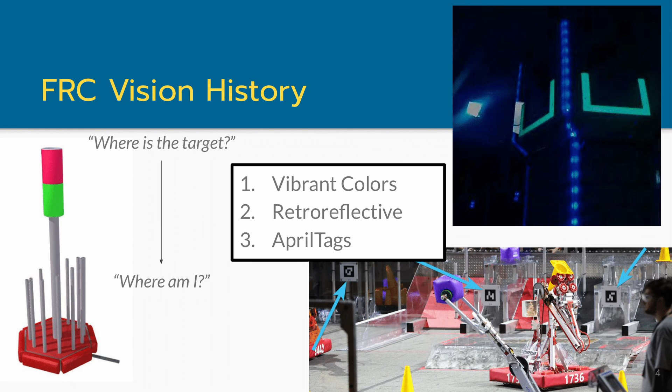AprilTags are industry-wide standardized, what are called vision fiducials. You might see these in some warehouses where they have automated robots moving around, and it's a better target for the reason that you'll see it in the real world. Retroreflective tape and vibrant colors are suspect to lots of noise and other issues.

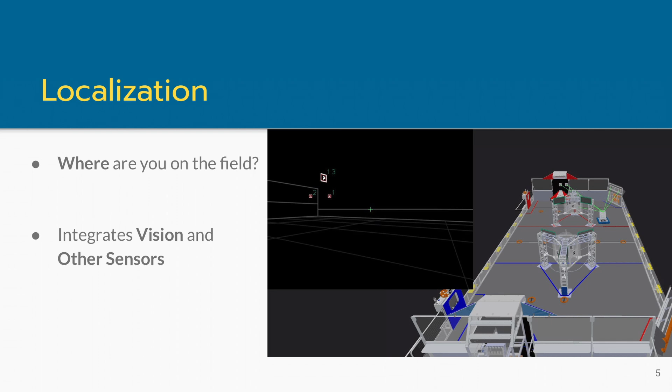Localization is ultimately one of the large goals of looking at the world with your cameras. It's the math behind answering where am I actually on the field, or in a warehouse, or in the world. It works by combining information from computer vision and other sensors potentially to estimate your robot's location in this space.

So why do we care about making this better? Why do we need to add more information? Hopefully we'll answer some of the how and what in this presentation, but you'll still be responsible for determining the when. Generally, you should employ vision when it's better than other choices, and in FRC this implies more points per second. To be better than the alternatives, you need a vision system or component of an automation system that's faster than mechanical alignment or human play, or that reduces stress on the humans at the robot so they can focus on other tasks. Achieving this can take multiple seasons, but you can't beat a human driver if it's not worth it. If your vision system is used to enhance autonomous, it needs to improve the average points scored per second rather than simply adding variability. Alternatively, vision should be employed when you have students interested in learning about it, regardless of the competitive benefits. I get a ton out of working on PhotonVision personally, and it has helped me develop in my career as well.

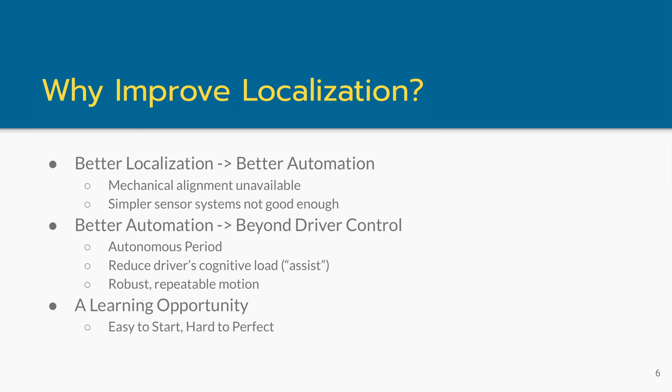So to drive home the point of exactly what localization is: the whole idea is that we're trying to give your software some computed notion of where your robot's at on the field. Here's a quick video of it working on a robot right now, where as the robot drives around, on the dashboard critically, you can see the little white robot moving around on the field. Again, that's the software's notion of where it thinks the robot is at on the field, calculating that in real time as the robot moves around.

Alright, so I want to get into a little bit of what we're going to describe as the vision pipeline. This really is, by and large, how almost all teams are breaking down this problem of using a vision system in 2024.

We've got the real world. There are things out there that you care about. Light hits them, reflects photons into your camera. The camera measures those photons and sends back pixel data to some set of processing hardware and software. That hardware and software is responsible for analyzing the pixels and trying to figure out, relative to where the camera is at, what it sees in the world and where it's at relative to the camera.

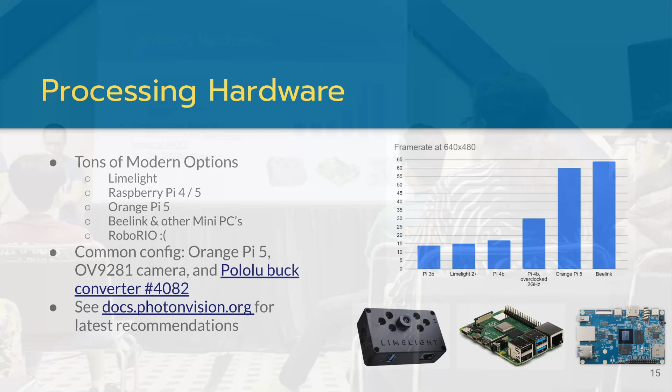So to go along with the camera, you obviously need hardware to actually process the frames that you get. A big question we get from teams is how do I pick hardware and what should I use on my robot? At the end of the day, it's trying to optimize between increasing FPS, decreasing latency, decreasing cost, and minimizing the challenge you face when using the software or hardware.

There's a lot of modern options out there for teams. We have the Limelight, probably the biggest, which is a Raspberry Pi, power supply, camera, LEDs, all in one nice package. It's great if you want a tried and true, easy to use package. After that, there's the Raspberry Pi, a very popular single board computer that lets you use single CSI cameras and has pretty solid software support.

The most popular option for teams using PhotonVision is the Orange Pi 5, which has better performance than the Raspberry Pi in a similar form factor. It's also relatively affordable. After that, if you're looking for even better performance, you get into the realm of mini PCs like the Beelink, where you get better performance but also face a harder integration challenge.

Now, obviously we're not limited to this. There are a ton of other co-processors you could use, but these are the ones that have been tested by a bunch of teams and are the most popular options, we'd say. Obviously we do have the RoboRio, but we don't recommend anyone does this kind of computation on the RoboRio. It wasn't meant for it, but it is still possible for teams.

The most common configuration we see for teams using PhotonVision is the Orange Pi 5 mentioned previously, the USB OV9281 camera, which is a global shutter camera, and the Pololu buck converter, which is found on the link there.

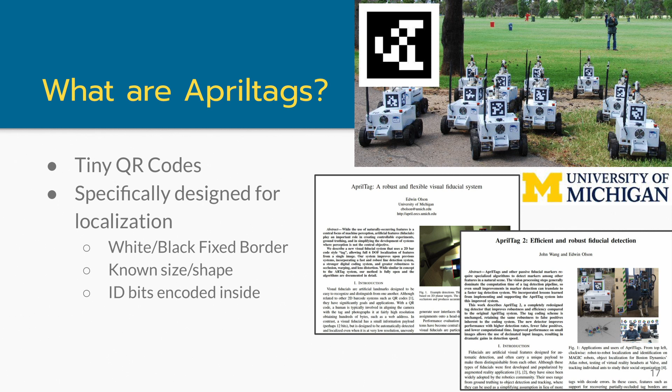These are placed on the field in known locations, and those are just in the game manual. In this case, there are up to 600 different tag IDs that you can encode using that 6x6 grid of pixels. The corner location, the transition between this white border and the black inner border in those 4 corners, is really critical for localization, because that's the information we feed into our code to tell us, well, we see these corners at this location, where must our robot have been?

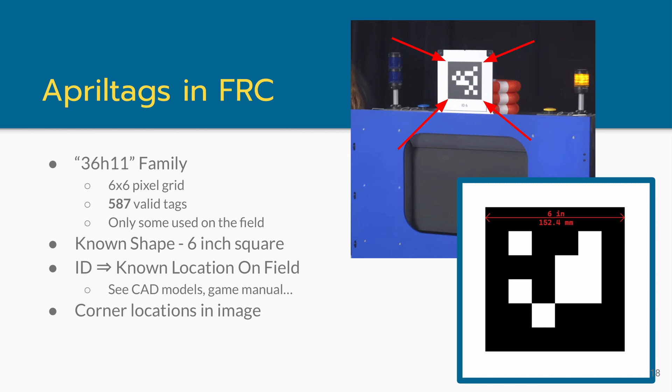Alright, so you guys all came here to talk about Apriltags, and the one thing we were going to not recommend you do is go write software to find Apriltags in pictures. There are libraries out there to do that. PhotonVision uses a library, WPILib provides you one. You shouldn't have to write the literal code going through pixels to figure out, is this pixel part of an Apriltag or not? That being said, it is useful to know what those libraries are doing under the hood, so I want to quickly go through the general algorithm used to find Apriltags in a picture.

Obviously, first step, take a picture. We go frame by frame through the image, one picture at a time. The very first thing we do is look for sharp black to white transitions, anywhere the brightness between one pixel and its neighbor changes by a large amount. That's where we detect those large transitions. If you're in Calc 1, you could think of this like taking the derivative of the image; more formally, it's taking the gradient of the image. Once you've got those areas of high change, where intensity changes very rapidly, you start to group them together.

There's a couple of algorithms you use to figure out: here's a group of sharp transitions, that's a small square. Then here's another group of large transitions, that's a bigger square around it. You're looking for those patterns of smaller squares within bigger squares to identify exactly what an AprilTag is.

When you've got a cluster of those smaller squares, you apply a process to figure out these particular locations in the image ought to correspond to the data bits inside the QR code. Then you measure how bright each one of those regions is, and based on whether it's light or dark, you extract a 1 or a 0 to get the ID of the tag.

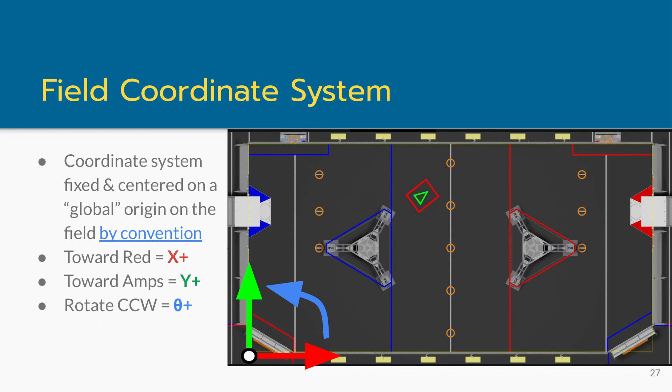It's worth noting that once you know your location in this fixed field coordinate system, you can do a little bit of math to find where you are in any other coordinate system. This is useful if you need things to be different based off of like red or blue alliance.

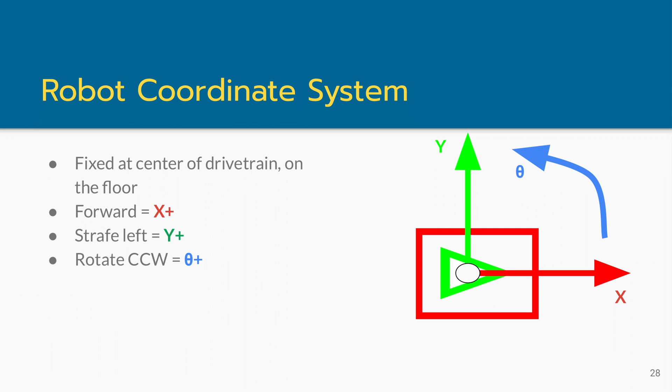Next, we have our robot coordinate system. This is fixed at the center of rotation of your drivetrain on the floor. Similar to before, forward is x positive, left is y positive, and rotating counterclockwise will increase yaw. Again, this is arbitrary, but this is the convention that WPILib follows, and we recommend you just follow this same convention.

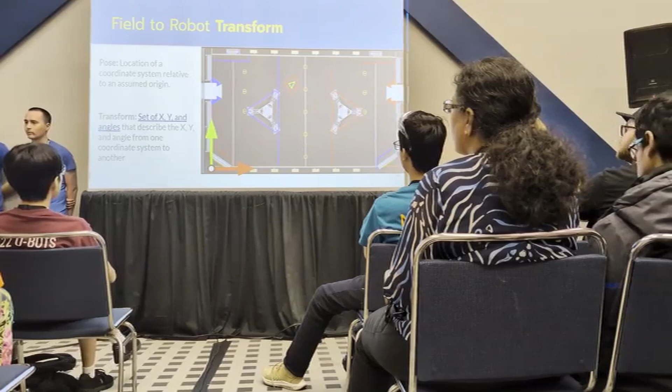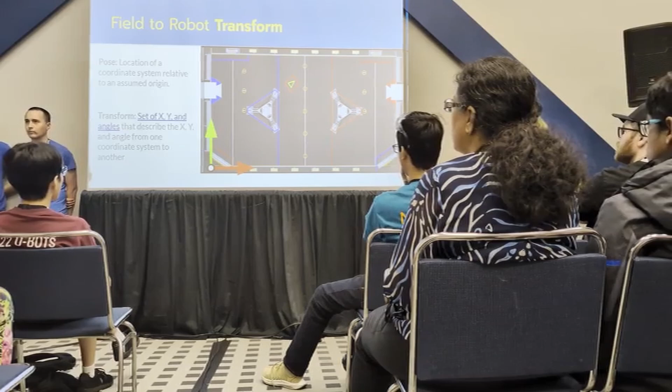Next, this is the final bit of vocab we have. Keep in mind that our final goal of this is finding our field-to-robot transform, or the pose of the robot on the field. When we say pose, we're describing something that provides both the location and orientation of a frame B with respect to another frame A. In our case, we want the x, y, and theta of the robot frame with respect to the field frame. And when we say transform, that's just a linear operator that allows us to go from coordinate frame B to coordinate frame A. In our case, going from the robot coordinate frame to the field coordinate frame.

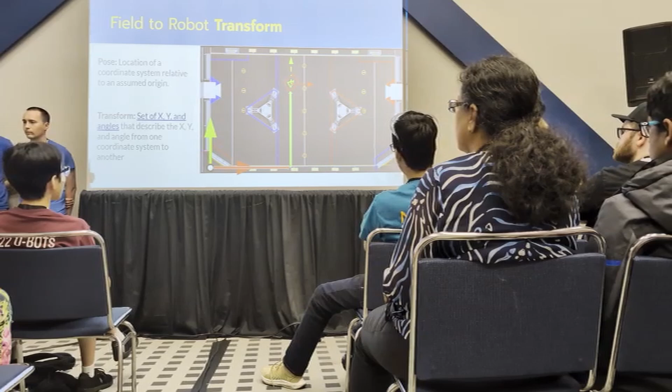Just for more clarity, the dotted arrows you see here is the robot coordinate system we described earlier, with the x-axis pointed forward, y-axis pointed to the left. That's the robot coordinate frame.

One thing to note, WPILib supports doing all of this in both 2D and 3D through the Pose2d and Pose3d classes. All the discussion we're doing today will be in terms of 2D, because it's a lot easier to think about, but anything we talk about will extend to 3D without losing any generality.

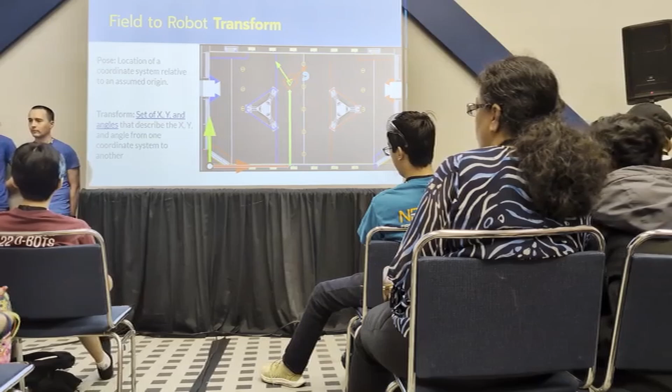So there's two useful properties of transforms we're going to talk about today. First is inversion: if we know the transform from A to B, we also know the transform from B to A. You have the field-to-robot transform, and if you know that, you also know the robot-to-field transform. Then we also have composition: if you know the transform from A to B, and B to C, you know the transform from A to C. This is very similar to tip-to-tail vector addition from physics class. Those are the two mainly useful properties that we're going to utilize today.

So the overall goal with all of this is that we want to find the field-to-robot transform. In order to do that, we need three things: we need robot to camera, we need to find where the camera is relative to the tag, and where the tag is on the field.

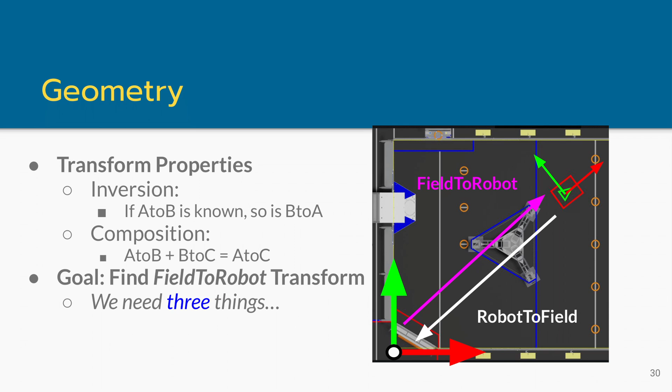So again, to drive home the point, tag locations are known, given to us as part of the game manual, but what we need to know is where it is relative to our camera. Remember from camera calibration, we're talking about 2D to 3D, that's how this plays in. We know where these corners are located in space, we're looking at them, so where must the tag have been located for us to have observed it at those pixel locations in our image.

This is an effect that increases as you become more head-on with your tags. So if your camera is below the tag, or maybe you're off to the side, this is less of an issue, because you can imagine the tag looks more like a squished parallelogram and not just a rectangle. When it's a rectangle, a little change will result in a huge change in the pose. Whereas if it looks like a parallelogram already, it's a little more obvious about where it ought to have been observed from.

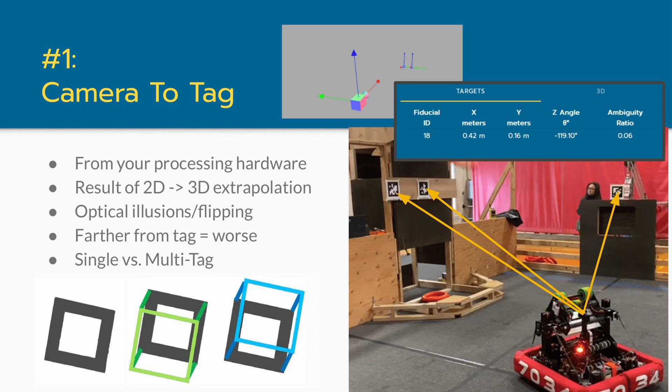The camera to robot transform is really critical in this localization pipeline because, as we covered in the previous step, we now know where the camera is relative to the tag. We want to figure out where the robot is relative to the tag, so we can then find out where the robot is relative to the field.

When you are designing a robot and you plan to put cameras on it, it is really, really important, if at all possible, to place that camera in CAD with its mount and take those measurements from the origin of the robot. That information then has to be put in the code so that transform from the camera to the robot origin can be used in our transform chain to back out where the robot is on the field.

That accuracy has some leeway, but most importantly, the rotations, the 3 degrees of rotation that camera can be at, will have more of an effect than the XYZ translation of that camera. So keep that in mind.

It is indeed possible to hand place a camera, pull out some nice straight rulers, and get it 90% of the way there. If you don't have lots of rotation, the rotations do add a lot of complexity.

I would recommend, when possible, when the design allows for it, minimize compound angling of the camera, because if you do in fact lose some of that information between building the robot from the CAD, which happens to all of us, it is much harder to recollect that information once it's in the real world.

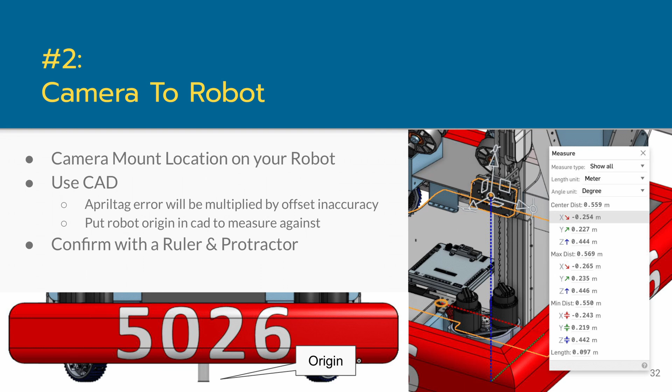So now we know the camera sees the tag, so we have our camera to tag transform. We have the camera to robot transform. We need to get the field to tag.

Thankfully, this information is provided, as mentioned before, in the game manual, and WPILib every year builds a map, effectively, that gets sent out with WPILib that you can use, based on the ID we decoded earlier using the internal bits, to ask this map where is this tag on the field. So this work doesn't have to be done by anybody, but it is an important part of the chain to find that location with these stacked up transforms.

We've sort of been beating around the bush here, but to get explicit, we've got these 3 transforms, nice and color coded. We've got field to tag from WPILib, camera to tag from our 3D pose estimation, and camera to robot from perhaps a CAD model or measurements that we've performed.

So we're going to do a little bit of algebra now to get what we actually care about, which is field, all the way on the left, to robot, all the way on the right. Like Mohammed mentioned earlier, you can invert a transform. We represented that with the -1 operator here, but that's flipping the order around. So now, instead of camera to tag, we've got tag to camera.

And then, like Mohammed mentioned before, you can also compose these transforms, right? If I have field to tag and tag to camera, I can just sum them up and get field to camera. Then I'll repeat the same trick a second time to get field to robot. So this is awesome, right? This is what we want. This is where a robot is on the field.

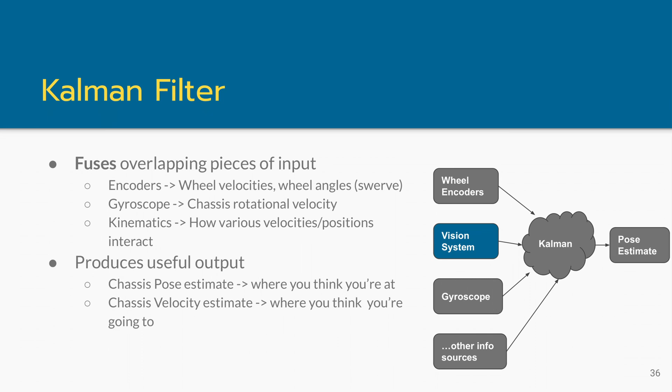So how do we actually go about doing all of this? You just have to do some simple math, just probabilities, but we're not going to go into it. It should be self-explanatory. But in reality, you don't have to do any of this, and we don't recommend that you do any of this by hand.

All of this is built into WPILib, and we strongly recommend you use what they provide so you can focus on a lot more of the interesting problems that are going on.

That's great and everything, but how do we actually use that data? That's a really important part in FRC. We need to actually use it in an effective way so we can score more points. Now we're going to walk through a few of the different strategies teams use to actually utilize their data from pose estimation.

So in this example, we're going to take a kitbot robot, and knowing where it is on the field, we're going to automate a simple task for a driver. Task automation is one of the simpler things you can do with some of this information because it doesn't require adding lots of steps around it. You just want one less step for your driver.

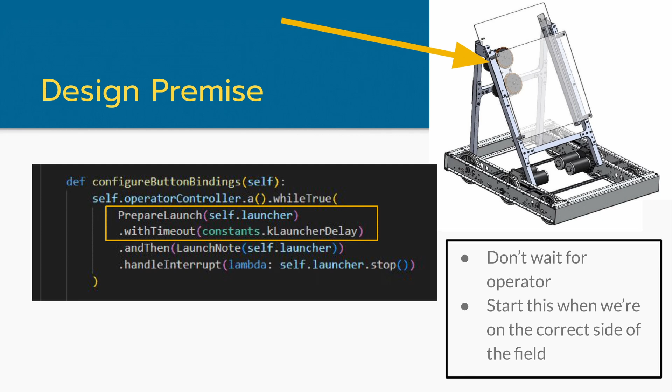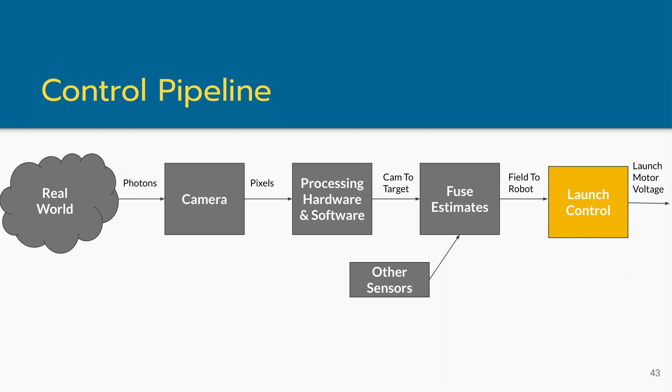With the information of where the robot is on the field, we can decide when to spin this up automatically. So we're adding a new block to our pipeline, and we're calling it launch control. We want to figure out when this spin-up motor should be spinning, so all they have to do is press the button to shoot it.

In that way, your driver has one less button to press, one less thing to think about, and they can focus on all the other stuff going on in the match. So this is kind of the quintessential example most people think about when we say, oh yeah, we put localization on our robot, now it just kind of drives itself. We're going to go through a little bit of how to make it drive itself in certain scenarios here.

Specifically, we're assuming you've got a swerve drive with 4 modules on it. How many people here have a swerve drive with 4 modules? Oh wow, yeah, all right. Everyone? Who doesn't? Hell yeah, thanks for raising your hand.

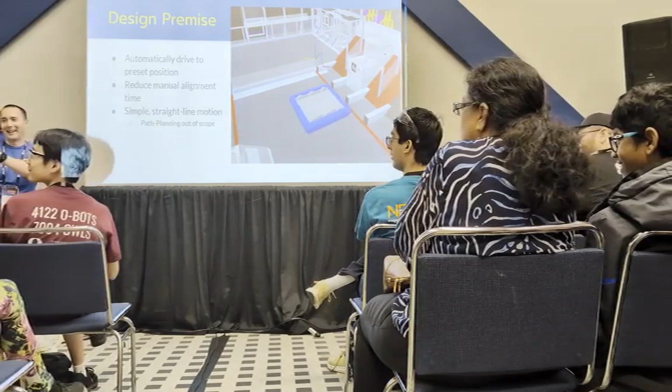For the vast majority of the room, the whole point is that no matter what drivetrain you've got, the basic cycle is your robot drives to a spot, does a thing, and you get points. We're going to try to add some automation to that drive-to-a-spot step. Critically, you have to pick a point on the field where you want your robot to be in order to score something. We're going to help reduce the manual alignment time, or automate that step, so the driver isn't sitting there fiddling around just getting into the right position. We want you to push and hold a button, and the robot goes to the right spot.

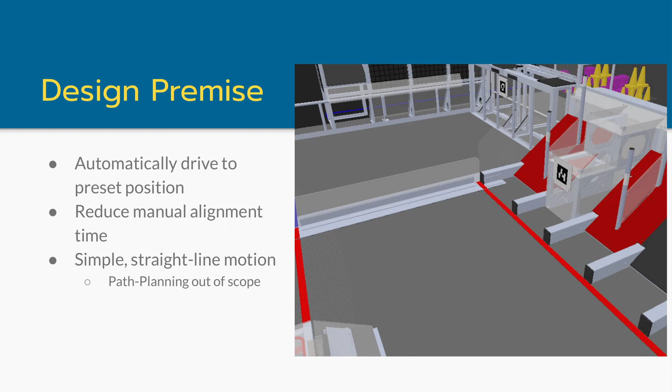Critically, we're going to talk about simple straight line motion right now. We're not talking about path planning, we're not talking about dodging another robot. This is when you're kind of close to where you want to be, you press and hold a button, and whoop, last mile alignment right there.

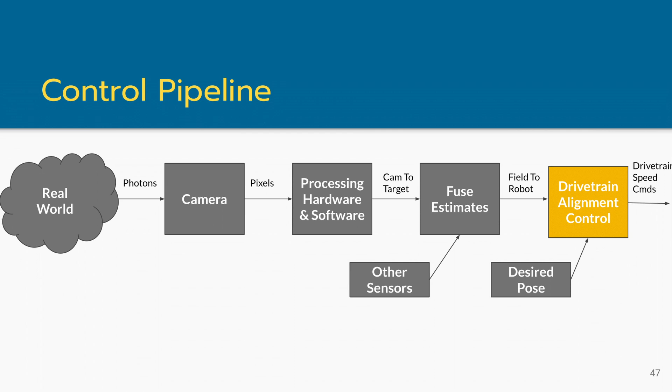Again, we're going to start with the same pipeline we already have. We have our field-to-robot estimate of where we think we're at on the field. We're adding a new block at the end called drivetrain alignment control. That takes where we think we're at on the field, takes where we want to be at on the field, and then sends speed commands down to the drivetrain to actually cause some motion.

This is kind of that same diagram, but run around in a little bit of a different way. Down here you've got the whole vision system we've been talking about so far. On the far side, you've got your drivetrain control—whatever the driver joysticks are currently going into, that same software controlling the motion of the drivetrain, making your motors spin and physically moving your drivetrain around, is all present here. What we're going to talk about is what kind of code you put in between those two things to actually get from where you think you're at right now to where you want to be.

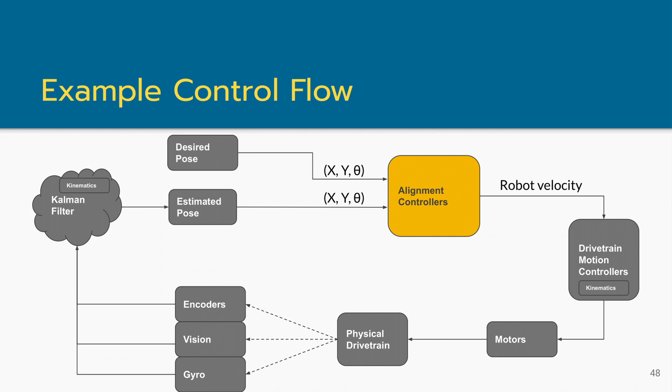Remember, each of these poses has 3 things in it: an X position, a Y position, and a rotation. The secret sauce isn't all that secret or complex. You take those 2 poses and split them into their individual components, subtract them, and run the error through a PID controller—really, you just do a PID control with your desired value and your estimate.

Most of the X and Y can have the same tuning, usually do. Theta's a little bit different sometimes, but again, you tune 3 PID controllers, and critically, the output of those 3 PID controllers should be the exact same commands that your driver is sending to the drivetrain. Just as your driver has joysticks for X, Y, and rotation speed, these 3 PID controllers produce that same information.

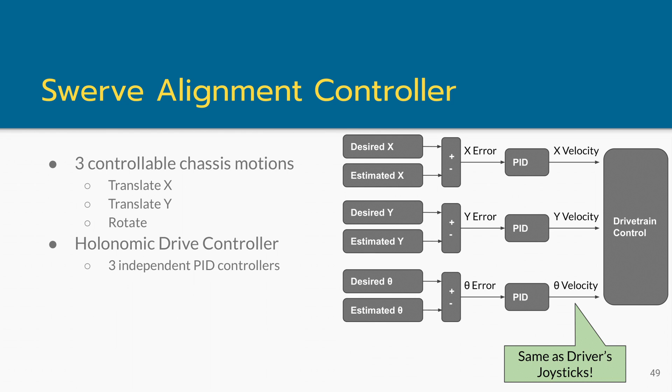So you write this code, and then you integrate it into your software by basically saying, if you want auto alignment, feed the output of the PID controllers into your drivetrain. Otherwise, just use the joysticks, and that lets the driver switch between automatic and manual mode. If you go look in WPILib, they've got holonomic drive controllers that wrap all of this up into one nice class for you to use.

And that's that. Awesome. Nearly the end of content before we open things up to questions. I wanted to jump into some planned improvements for PhotonVision, at least as of right now.

A big one of those is docs and examples, especially with simulation. A lot of our docs and examples were developed when a differential drive robot was looking at retroreflective tape targets. That is, as our little demo here described, no longer true, and we're definitely a very much swerve-centric, Apriltag-centric competition at this point. So making sure that's reflected in the docs is really critical.

Machine learning, we had some demoed, beta sort of features, doing note detection using Orange Pi 5s this year. I don't know if anyone here ended up using note detection on their robots. Hey! Yeah. Heck yeah. Sweet. That's awesome to see. So trying to expand that to be on more coprocessors with more varied notes, maybe more varied models than just notes, and trying to expand the infrastructure around that would be awesome, especially looking for contributors who are excited to jump onto that.

Not a factor graph announcement, but I have a thing now that does localization slightly differently than the way that we've described, but at the end of the day still does the same thing, just with more probability that I don't quite understand. But it works better, and seems to address the pose ambiguity issues by doing math in a different way. So definitely going to be a huge season in 2025, and especially as we gear up for 2027 with the new robot controller, lots of conversations to be had around that.

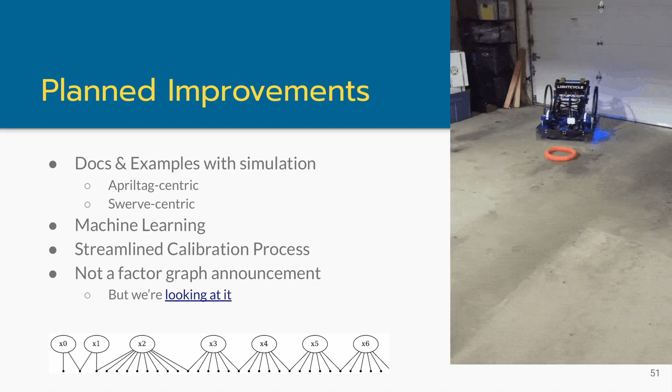All right, so one last thing - especially since there's a lot of content in here, you saw some pictures of robots, some GIFs of things happening. For the record, a couple of us work on teams actively right now, but it's not like we have dedicated PhotonVision robots we're developing this on. This is a community project.

The other thing I want to note is a really special thank you to the teams talking about how they won awards with this. It was really heartwarming to me personally to see that not only were you able to use the software and integrate it into your robot to do cool things, but then to be able to talk about that to a judge. That was something I thought was really impressive. It made my day when I saw some people saying thank you for that. So again, thank you guys for doing that.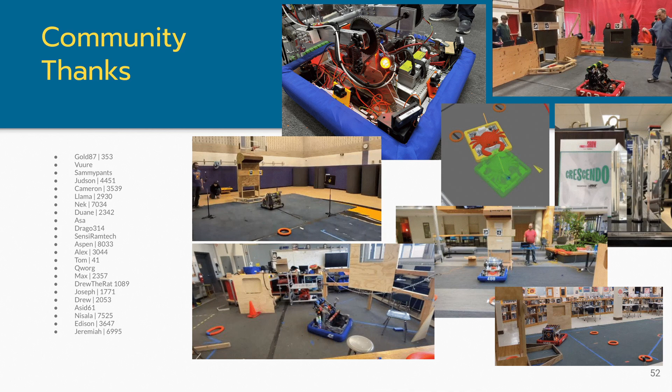Go ahead first. How do you find the standard deviations for pose estimators?

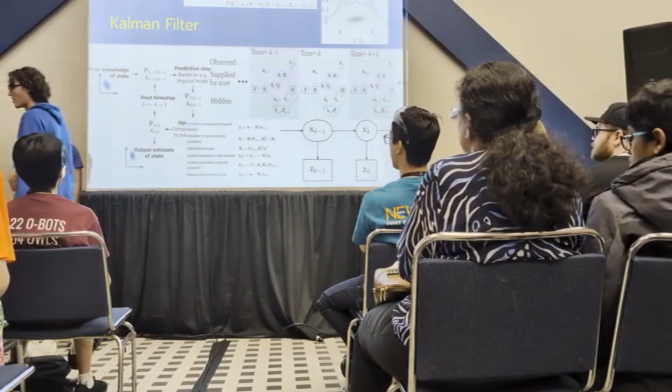I think Advantage Scope will let you do some statistics with data. So if you collect camera data, your robot sitting on the field looking at the April tag for a couple minutes, just collect the data of your pose. There'll be some noise that goes up and down. You can measure that if you want. Alternately, you can just tweak and tune it. If your pose is converging too fast, increase or change the standard deviation so it does not converge as fast and filters out more.

As for the methods of collecting that information, we have a 100 sample long standard deviation calculator in the PhotonVision interface. And Advantage Scope has a statistics tab that you can add signals to, to collect that information about those values as well.

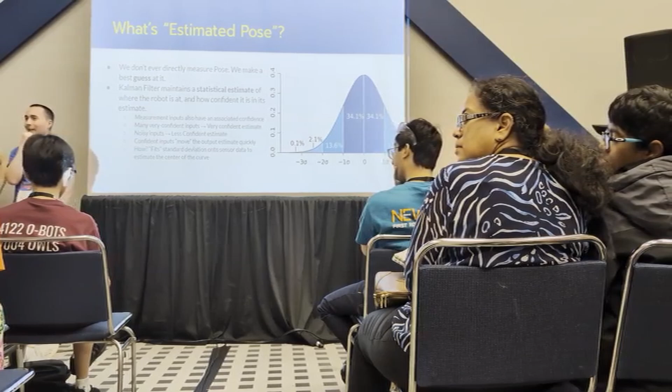Will multiple cameras, like two mounted in front of the robot, reduce flipping, and by how much? How significant would it be to get multiple views of the April tag? Yes, but also no.

The tricky thing with multiple cameras is they are never taking pictures at the same time, asterisk, of course. You can get expensive cameras that allow you to run hardware digital lines between them to synchronize frame captures, but that's not something we have support for on the software side, because the software also has to understand they're taking those images at the same time. Were the cameras taking those pictures at the same time, you could present all of that information to the estimator as a single frame, and it would account for that.

But they do multiple frames per second? One alternate that is less robust, that we did use back in 2022 on our robot, is if you get all of the individual estimates, all the possible estimates—you have the ambiguity there, that gives you two possible locations on the field. Photon does tell you, if it can, it will try to tell you both of those options.

So you collect all those up, and then if you have multiple cameras seeing multiple tags, all producing multiple poses, now you've got poses scattered all over the field, but hopefully half of them are clustered in one spot. Pick the cluster then. It's effectively the algorithm we used in 2022. It's not necessarily academically rigorous, but it did work reasonably. One caveat is you'd have to wait for all your cameras to collect information in a certain time step to then make those decisions.

One thing we haven't touched on is the multi-tag feature in PhotonVision—Mega Tag is similar on Limelight. When you're able to see multiple tags, it understands better where it is because there's more data points, and pose ambiguity is far less of a concern.

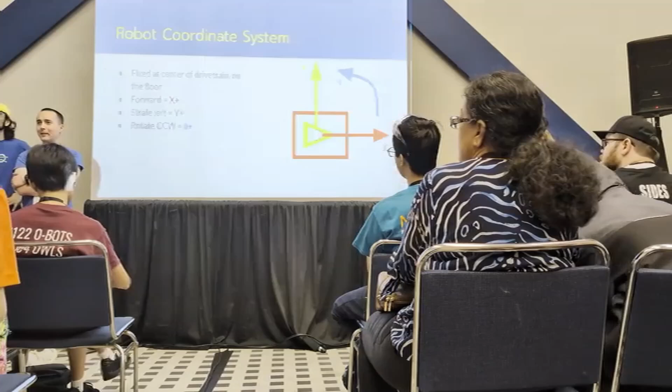At the very beginning, you were showing the brightness and gain adjustments. I also noticed there was auto exposure, which was unselected. Do you have guidance on using or not using it? I don't—we should probably take that option out.

There was a point in time when we were thinking for April tags it would make sense. The problem was that it would change unexpectedly on the field. If you weren't perfectly tuned otherwise, you could randomly lose localization. So it was better to say, get it fixed, run your robot around on Thursday or practice day whenever you can.

Make sure you're seeing everything relatively evenly and just leave it fixed. The field is lit fairly evenly, so you shouldn't need to worry about it. Asterisk, yes. And another thing, auto exposure on some cameras tends to just not behave right, and that's one of the things that's unfortunately out of our control in a lot of cases. Some cameras just don't play nice.

If I can extend that, I was at an event where I thought I heard a team complain the lighting was different than they were used to and had some challenges. Do you have guidance on how to check that in a new environment? The field calibration period that you get at events is probably the best time to do that.

The rulings have updated this year. You are allowed to have carts on the field, and that is especially helpful during field calibration where you're not allowed to drive the robot. So if you get like a furniture dolly and put your robot on it and just move it around the field, look at all the tags, make sure you're picking them all up from the distances you would want to. If not, adjust as needed.

The other small pitch I'll give for PhotonVision: there is a lesser used but available feature where you can, from robot code, trigger it to save images to disk. You don't usually want to record the whole videos, but you could. If right before you take a shot or do something on the field, you trigger a bunch of image saves, you can review them after the match to make sure you were identifying the tags you thought.